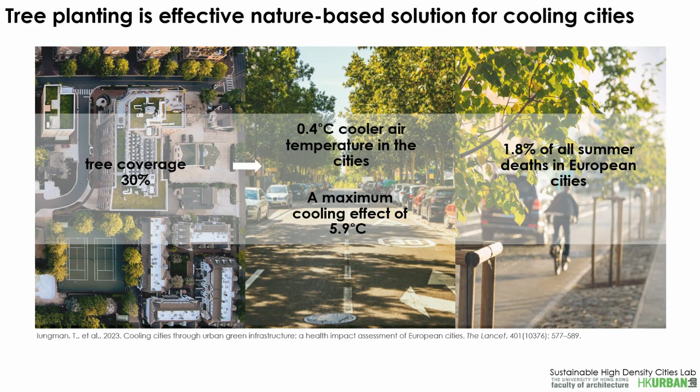And some cities are setting much more ambitious targets higher than 30 percent, for example, the city of Melbourne and Singapore. But existing policies fail to mention where to plant trees. And the greenery targets at the city level or even the development site level are sometimes KPI-driven indicators, and are inadequate to guide the real landscape design practice.

And in the research community, the literature disagreed upon whether to concentrate trees in fewer locations or spread them out in a larger area of a big site. So far, knowing where to plant trees is still a challenge in both design practice and the research community. So there is a need for a refined understanding of the cooling benefits associated with the locations rather than their quantities.

Since I'm living in Hong Kong, one of the most compact cities, what interests me is how we can achieve more cooling with fewer trees. The research question is: is there a systematic way to optimize tree locations for their best cooling performance?

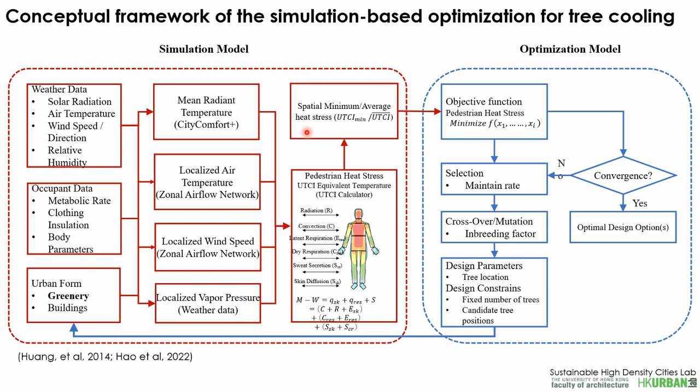And the algorithm mimics the species evolutionary process by selecting higher performing design options, and combining crossover and mutation produces new generations of design until optimal solutions are achieved, as illustrated here. I will go through in detail about the two models.

First, we develop a rapid simulation model. As I mentioned, because we use an optimization algorithm, the objective function needs to be called frequently for evaluating the performance of each design solution. So it is key to develop a faster prediction model that assesses the tree cooling performance.

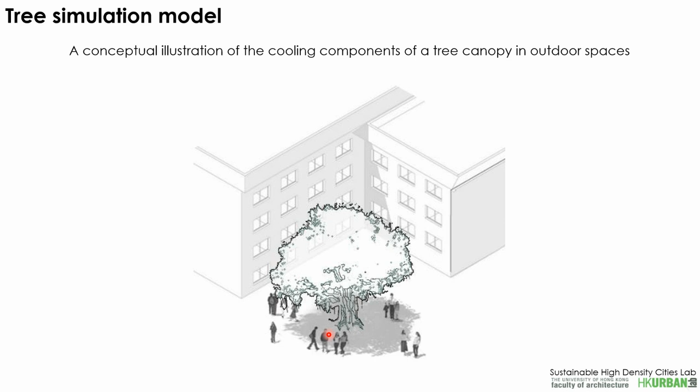And as we know, trees are excellent multitaskers. They can not only reduce the solar radiation by shading effects, they can also lower the temperature by evapotranspiration. And also, they can modify the airflow passing through the canopies and also the moisture around the trees. So it is important to consider all the components of the cooling mechanism.

And our model can simulate all the cooling components of tree canopies in an outdoor space. And the method developed also runs reasonably fast, which can be linked with an optimization algorithm.

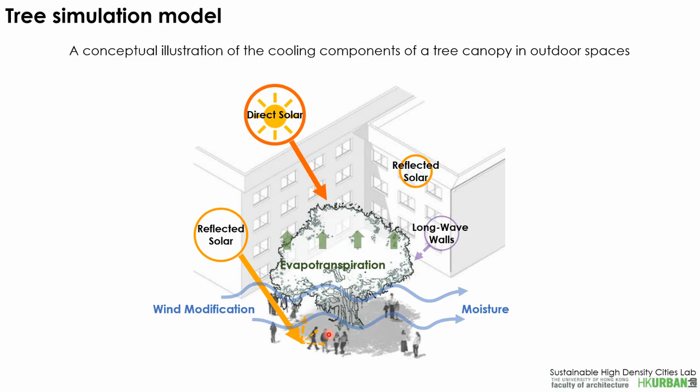Also, to evaluate the model performance, we did field measurements under tree canopies during the hot, temperate, and cool seasons. We selected 5 trees and put a whole weather station under the tree canopies, and we measured the air temperature, the humidity, wind speed, and also the solar radiation under the canopy.

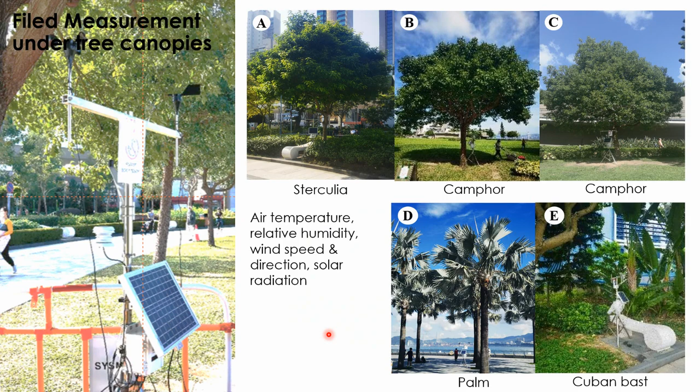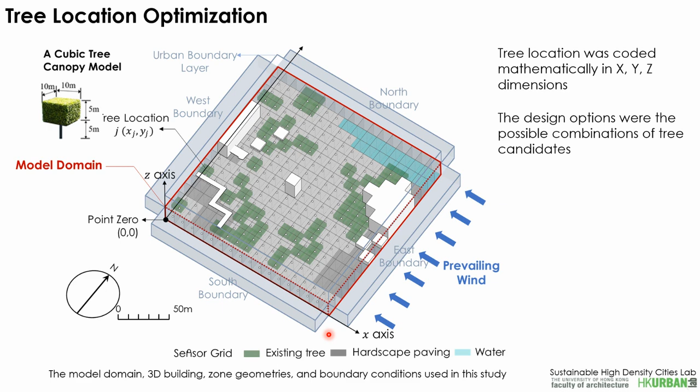The objective function here is set to minimize the potential heat stress. And I will move on to the results here.

After our model evaluation, a reasonably good agreement was observed between our simulated air temperature and the measured one. And we also do the model evaluation by observing the difference between the measured and the predicted one. And there's no systematic error here because the differences follow a normal distribution. That means there's no over and under predictions in our model.

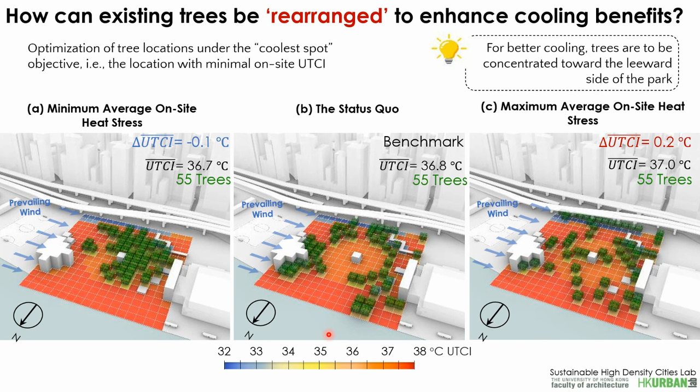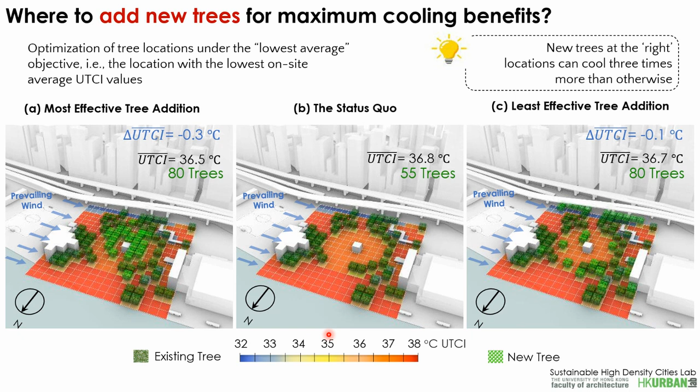But you may question me that it's not possible to rearrange existing trees. How about adding new trees? Our workflow can also do this task. The workflow will tell us new trees at the right location can cool 3 times more than otherwise, as shown here.

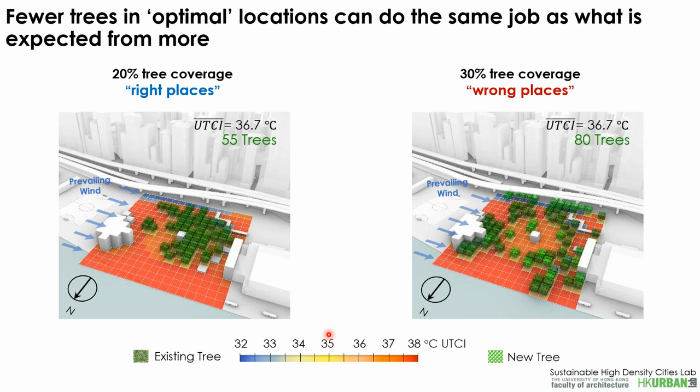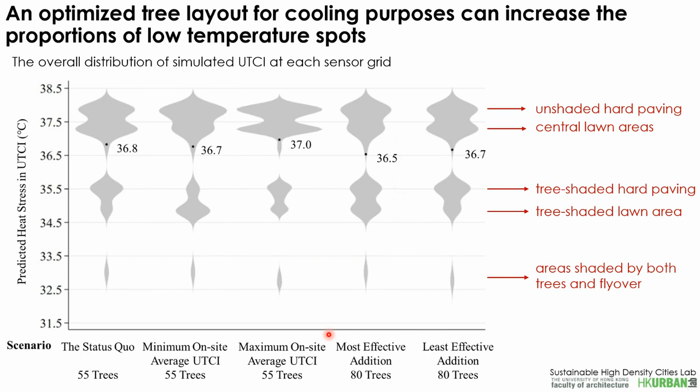To conclude, our developed method can automatically search for optimal tree locations regarding their maximum cooling performance. Also, an insight for landscape design: trees cool best if they are concentrated towards the leeward side of the incoming wind. Also, we should put trees in their right place to achieve their best cooling performance. At last, the proposed method can inform research and also landscape design in the future concerning urban cooling as a target.